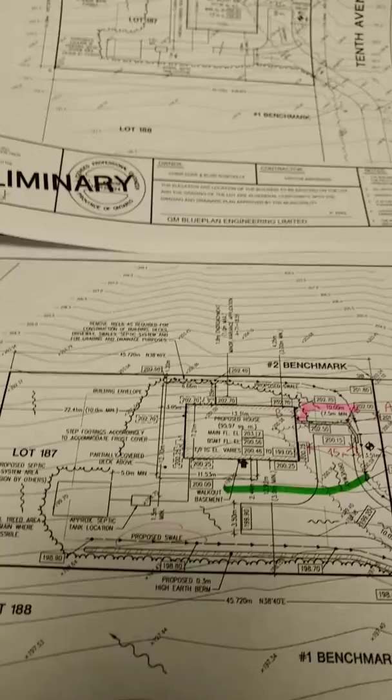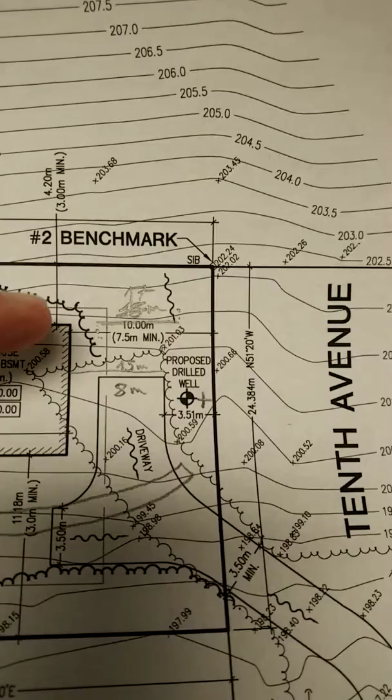I just have some comments though. First of all, I see the contour lines here, but this section right here, it doesn't have this real even gradient. It's quite flat here, and then there's a cut line right here, and it jumps up pretty high. So right there where it says 10 meters in my pencil line, there's a real evident cut line, and it almost lines up with the 4.2 meter setback from the property line where the cottage is going to have. Also, from the front of the cottage to the property line over there, it's 17 meters.

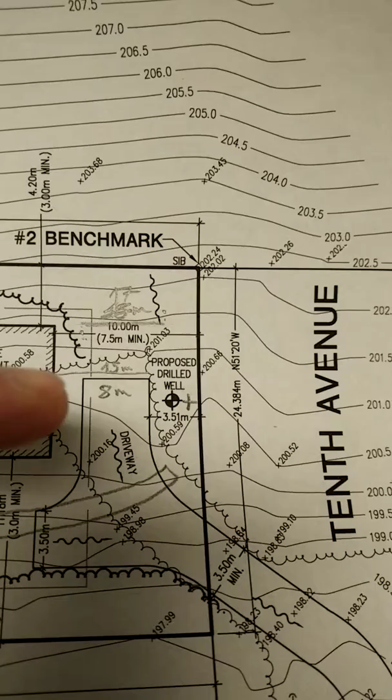And I measured it was approximately 15 meters of opening here. That's actually quite flat. I'll send another photo too. There's actually a drill rig in there right now, and I don't have great pictures, but what I'll send you, you can see it's actually a quite flat open area. And if there's a drill rig in here, that must be, I don't know, 8 meters wide or long.

There's still space here in the front of it too to back in and out. You can see to drive up here and back in and go into the well spot there.

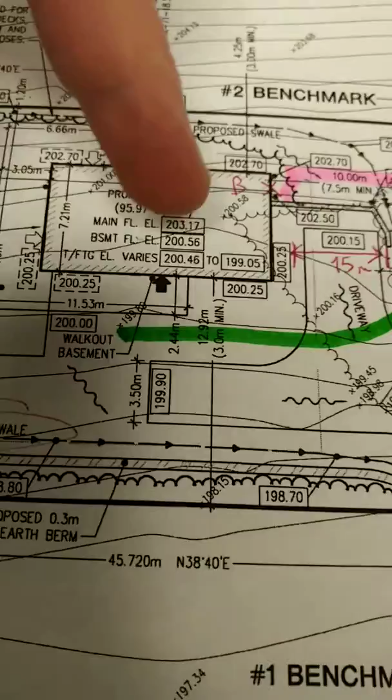I was also thinking we really want to minimize tree removal, so I was thinking we could put in a French drain here, which would capture runoff this way and runoff this way. So on this map here you sent me today, I think it would be good to have a retaining wall here. We're going to have lots of boulders that we're going to pick up, and I think what we could do is make a simple retaining wall right here by stacking boulders.

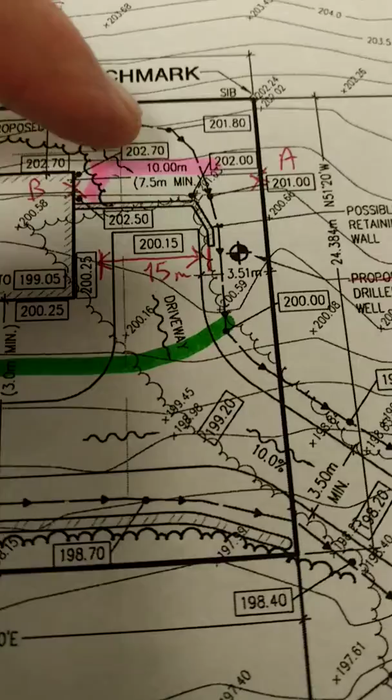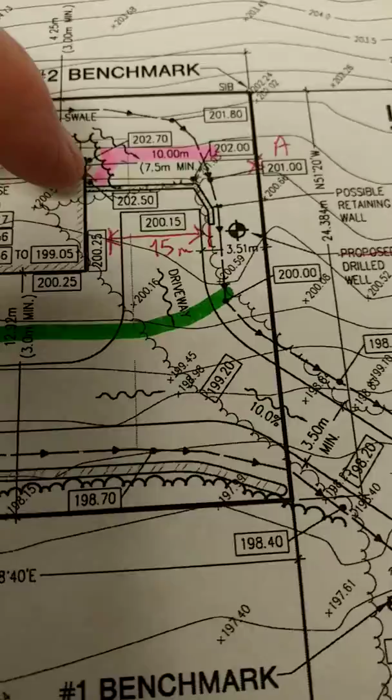So moving your retaining wall here, moving it back up there, and I probably would curl it down here so that we can have some fill on the side of the cottage here. Because right here, I would like the grade to come down and be at grade right here, but this should be sloping up to the back of the cottage here.

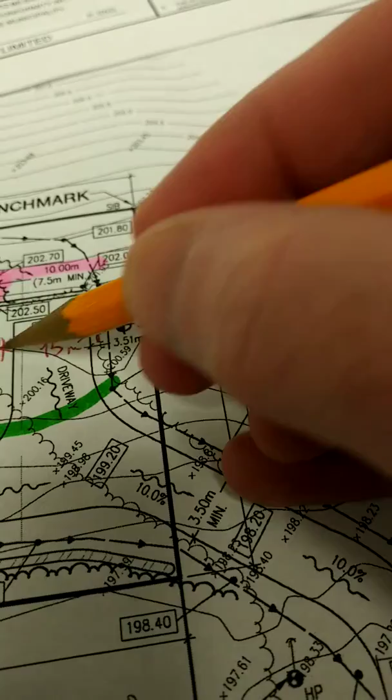The second thing is, I just should put in here, is we have an easy 15 meters here of driveway space. This is 10 meters from A to B. The well is now existing, it's being drilled right now. The truck right there, and the truck is actually oriented like this.

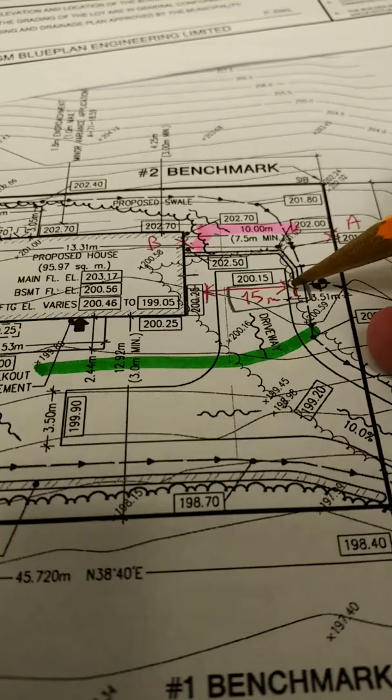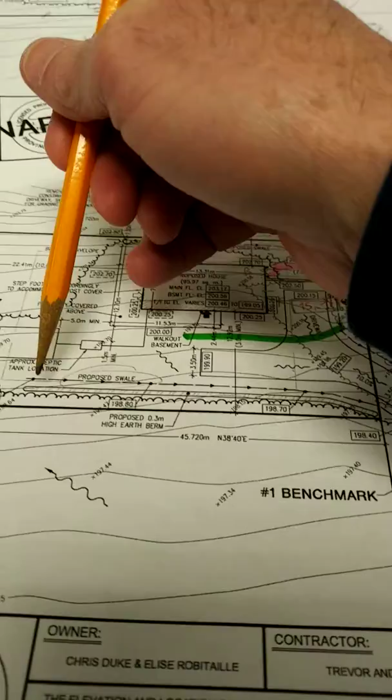I don't want to put a driveway here because we'd have to take out a lot of trees, and also I don't want to put a swale all the way along here with a berm. That would mean a huge amount of tree removal over this whole distance here. So I really don't want to put a berm right here. That would be basically clearing my whole lot.

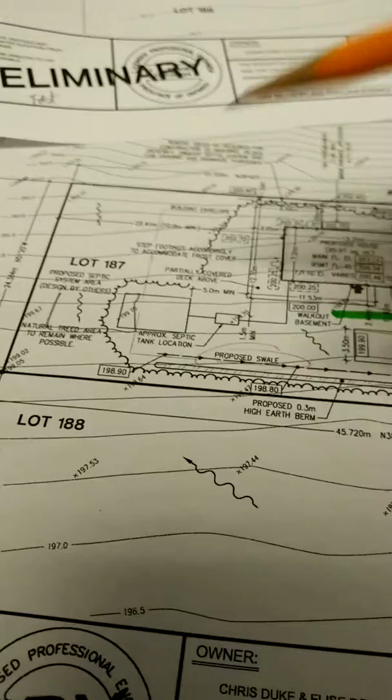This septic tank, or weeping bed, would actually be more located right here. Minimum of 3 meter setback from the property line here and here. I really don't want to have this here. We might have a little backup spot here like this, but that's about it.

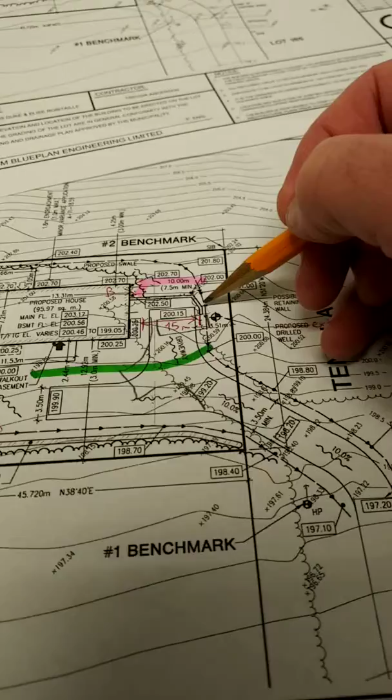This swale here, I'm hoping that this French drain would be able to capture the water as it comes down, and because of the nature of the surface here, it's highly porous. I was just there on Sunday, 3 days ago. There's no signs of runoff coming down here.

So this big drain here, again, I would be chopping out all kinds of trees, and I really want to avoid that. My whole intention of having the French drain here is to minimize the surface runoff. Okay? Do you want to give me a call and we can discuss? Thanks.